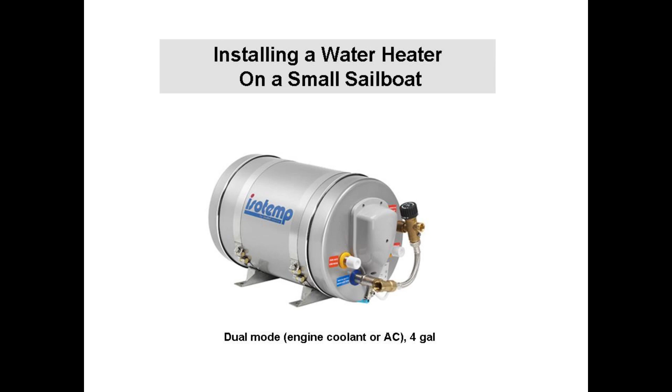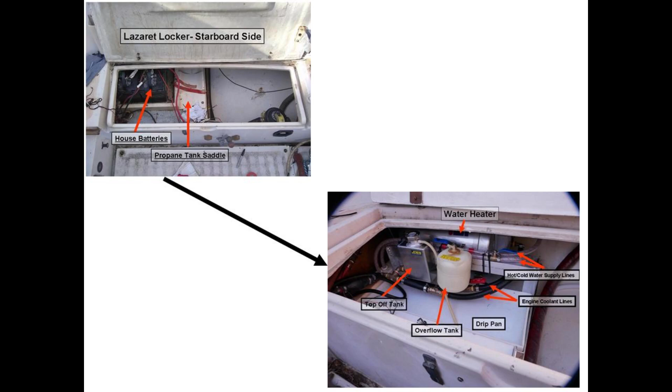I'll be turning this space in the lazarette locker you see on the upper left into this one on the lower right. Since the water heater is higher than the engine, I'll have to include a top-off tank, and I'll have to relocate the engine coolant overflow tank with it. So in this video, I'll go through planning where to put a water heater, building a self-draining platform for it to catch water heater leaks or plumbing leaks, and then hooking up AC power, connecting plumbing, and finally connecting to the engine coolant system.

So here's our boat, a 1979 Pacific Seacraft Orion 27 sailboat. It's 27 feet length on deck and about 9'3" on the beam. And at one time it looks like our boat had a water heater and it was crammed into the busy space behind the engine. We'll be going up here to the lazarette locker for this install, but I'm getting a little ahead of myself. So now a water heater is going back on board, but where to put it?

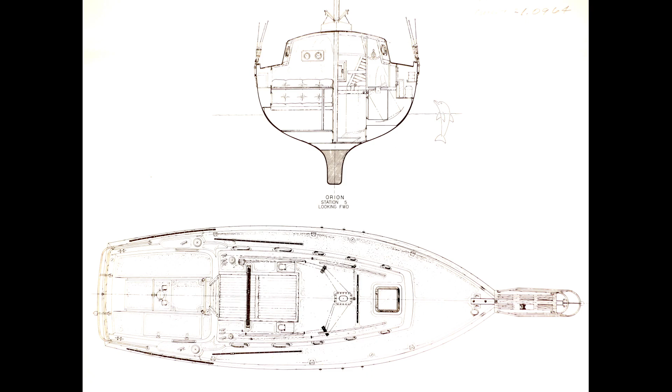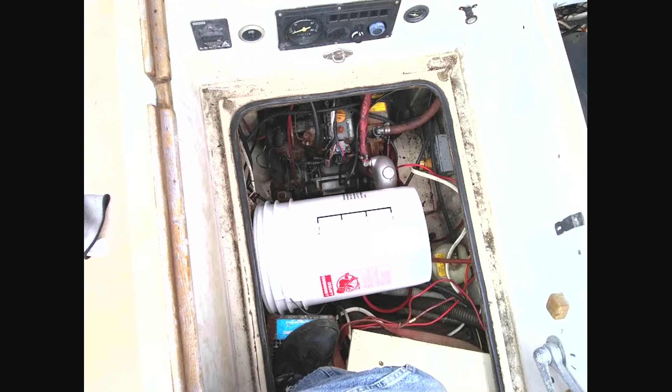Since the heater needs to be close to the engine to keep the coolant line as short as possible, and this is a small boat, there aren't many options, even for a small water heater. And the 4-gallon tank I chose is close to the smallest water heater I could find, whether cylindrical or rectangular. And besides, a smaller tank probably wouldn't be sufficient for a shower of 1 or maybe 2 people. The 4-gallon Isotemp Slimline heater is about 20 inches long and 12 inches in diameter, very close to the size of the white bucket you see here behind the engine.

This location behind the engine would keep the lines short, and it would also be below the fill cap of the engine's coolant system, so a top-off tank wouldn't be needed. And finally, another advantage, it would keep the added weight centered and low. So this is about where there seems to have been a water heater back in the day, but I think this would really limit engine access.

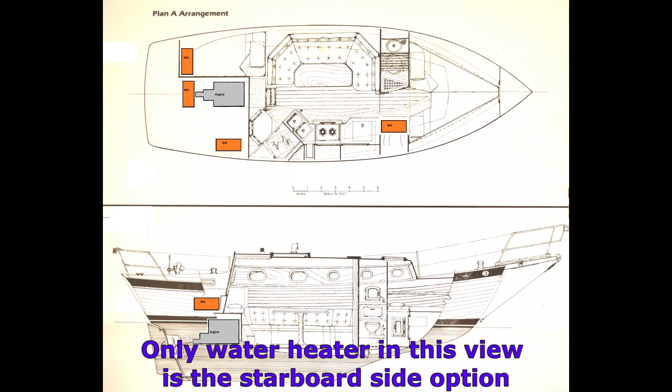So here on the ship schematic I have 4 brown boxes which are potential locations to house a water heater. The location in the midship area of the starboard closet, which some people chose for a water heater location, is far from the engine, and that might be fine for a 110 AC element to heat the water, but not for engine coolant. It's too long of a line. Anyway, the other location I see is possible in the port side quarter berth, but that's difficult to access to check on leaks, and it would also make it really messy to try to fill a top-off tank that would be required alongside of it.

So I decided to go with the space on top of the built-in fuel tank in the lazarette locker on the starboard side of the boat. The downside of this location is that I'll be adding about 50 pounds of weight on the starboard side. I'm not sure if that'll affect the balance of the boat much, but items I store in the port side of the boat in the quarter berth will probably offset this a bit.

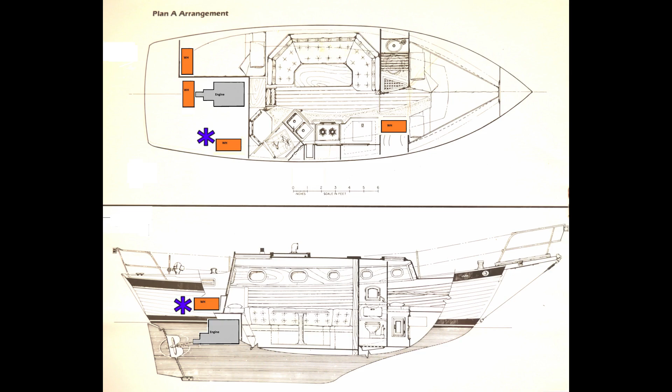First, I had to clear out a tray holding a couple of house batteries and a 6-pound propane tank used for the oven and range. That's a really bad combination to have in an enclosed space. And the tray that housed them, without an air gap underneath the tray on top of the aluminum tank lid, allowed water and salts to corrode the tank lid.

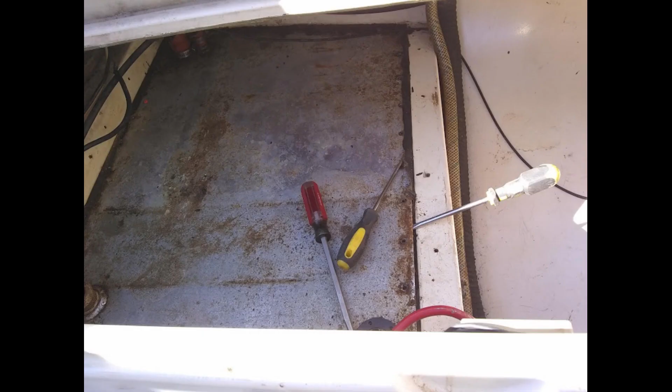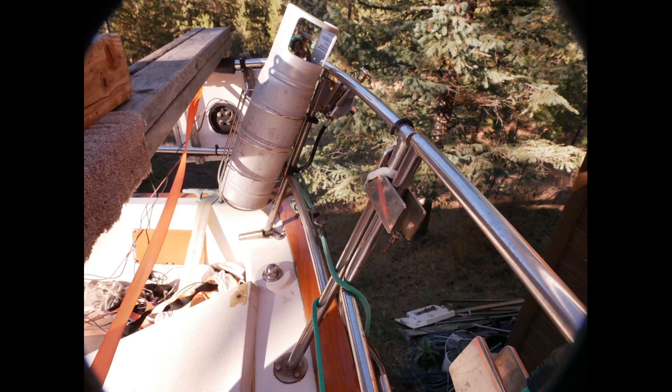So after clearing this space, I replaced the fuel tank lid with a new one, cleaned the sediment and sludge off the tank walls, and I added a circular access panel to enable me to clean the tank if needed, right there in the middle of the lid. The propane tank is now on the stern rail.

Next, you see here a dry fit of my plan. The water heater is partially concealed on the far upper right. It's pretty close to the engine, so I'll only need about 4 feet of coolant line, but the problem with this location is that it's above the engine, and that means I'll need to attach a small coolant top-off tank near the heater, and I'll need to replace the current cap on the heat exchanger on the Yanmar diesel 2GM20F with a 30 psi cap.

The top-off tank will get a 16 psi cap. And finally, I'll need to relocate the overflow tank next to the top-off tank. There is just enough clearance to get coolant lines up from the engine between bulkheads under the instrument panel and over to the water heater.

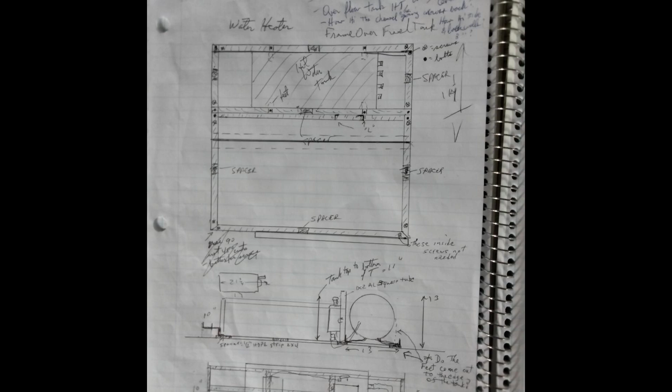So the next thing to do was design a mount to secure the water heater to the boat, along with co-locating a top-off tank and expansion tank with it. And since I was locating above the fuel tank lid, I decided to build an aluminum mount with a self-draining plastic tray to catch drips. I welded aluminum L-bar for the frame.

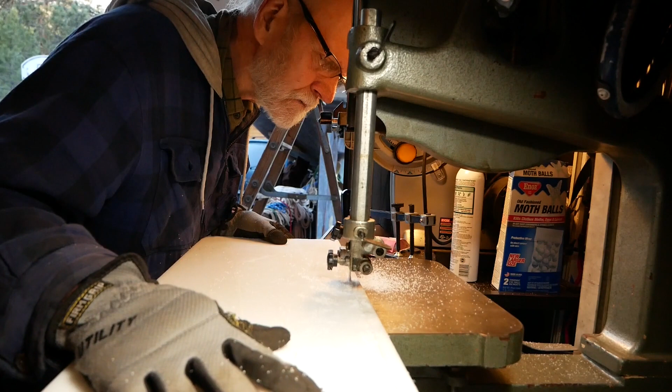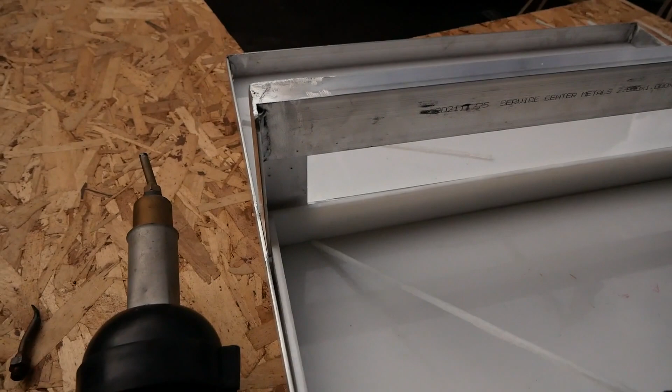After cutting out all the pieces for the plastic trays going under the heater and under the top-off and overflow tanks, it was time to weld those. This is a welding rod, if you will, that comes out of the scrap that I have. I'll be welding along these seams right here to make a waterproof tray. And I'll be swapping out the broad heat tip here with this tip made for welding into corners. So I'm going to start off with a setting here on the end of about 5.

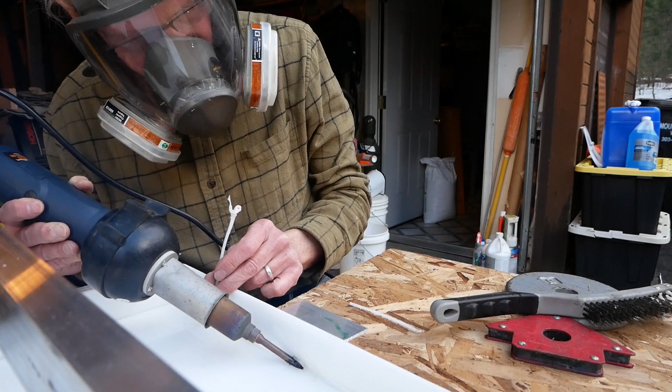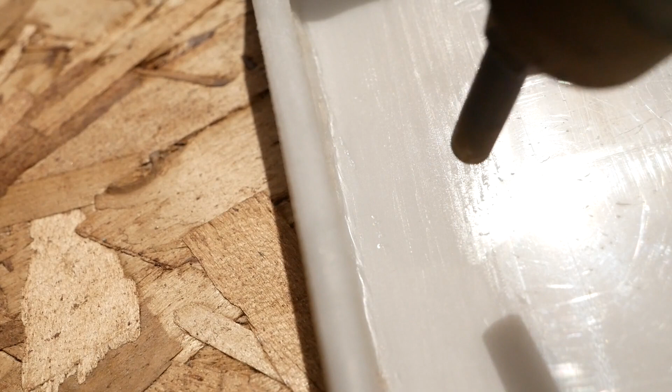I sanded and used a rasp to flatten uneven welds, then used a broad fitting tip on the welder to heat smooth the surface. Next, I installed an outdoor AC outlet behind the water heater and ran a 3-conductor marine grade 16 gauge wire from it to a new breaker on the AC panel. But after digging into that, it looks like I'll have another project ahead of me, and that's installing a new DC and AC panel and connectors. Back to the water heater.

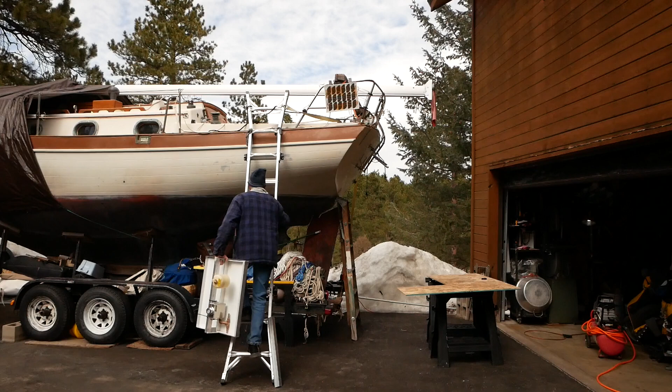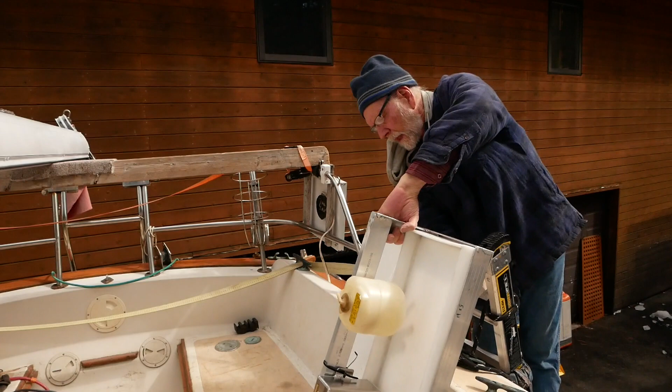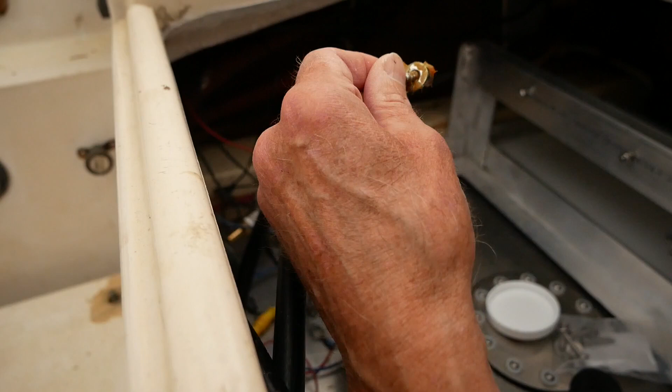Because this is a tight fit, I made many trips between my shop and the boat to check on my work with tray in hand. Water tank, hot water tank. That's a tight fit. When we get in here, I pre-drilled into the bulkhead surrounding the fuel tank and used 8 screws to secure the tray with the 1/4 inch thick plastic spacers underneath the tray and above the tank. And since the screws are stainless and the tray is aluminum, I coated the screws with Lanocote.

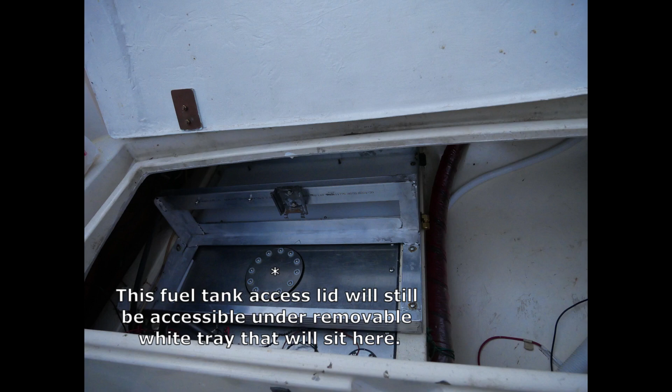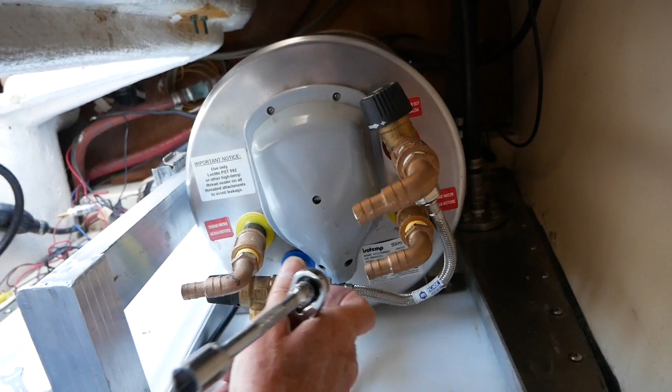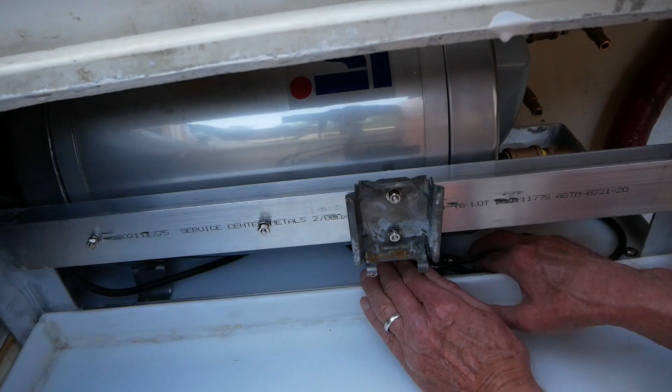Finally, it's time to mount the water heater and the other hardware. Anyway, finally got this thing in. Looks good and solid. All right, now to get out of here. Well, got cut on something.

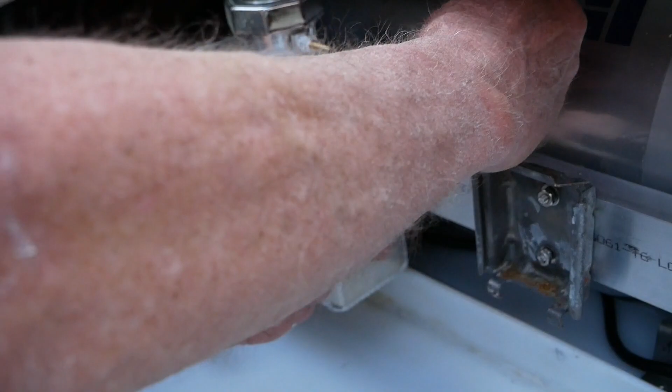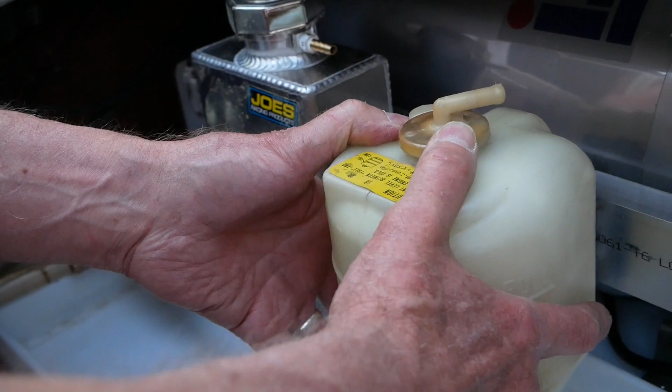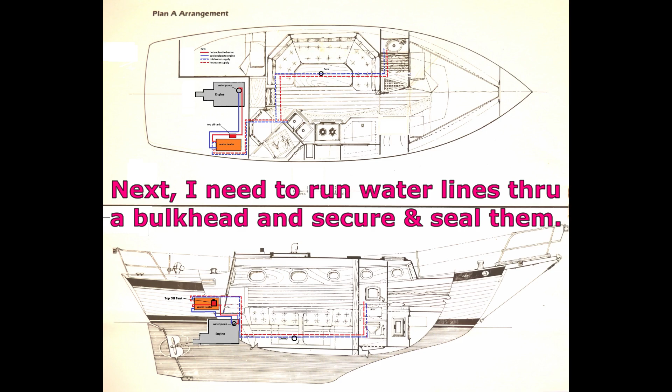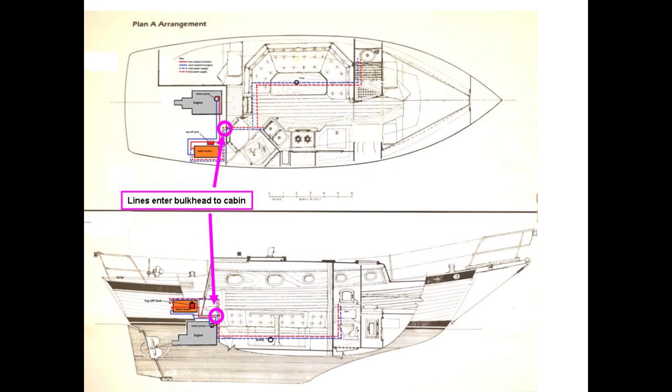That's the fill, this is the overflow tank. Once I get my sender connected here with these wires, I'll install this little overhang which both protects that sender and gives me a little extra storage space here. I then mapped out where to run. And starting with the water supply lines, they need to go through the bulkhead behind the engine. I wanted them to be held in place for stress relief on the water heater connections and keep water and other fluids from dripping into the cabin.

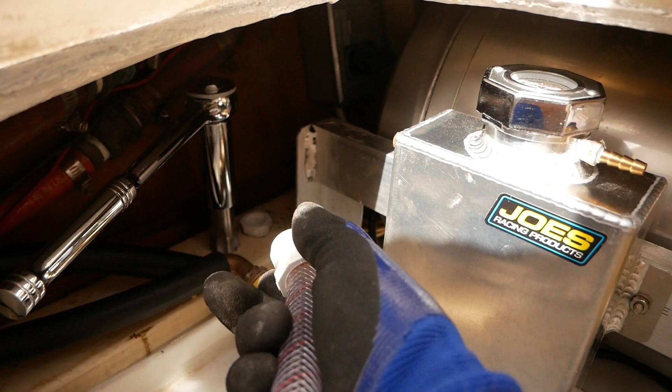I'm using a 3/4 inch pipe threader here, tap, and I'm going to go in after this and put in a little bit of epoxy to seal up the plywood. This is going through gel coat, then plywood, and then I'll thread in these little collars here. Well, I use them as collars, but they're adapters. Fairly tight fit here. Probably put just a dab of silicone on here to just seal it.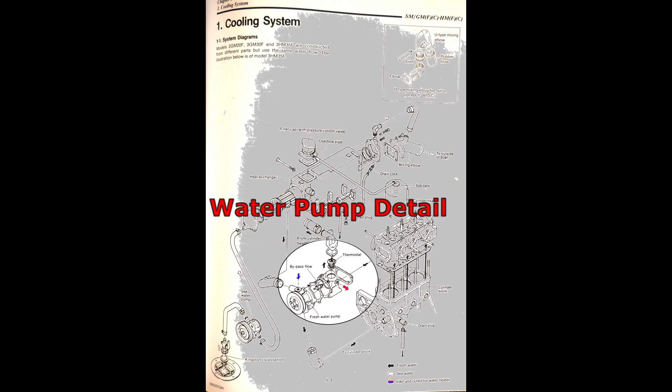Consulting the service manual for my Yanmar 2GM20F engine, I've identified where to attach the coolant hoses from the water pump to the water heater. I then drain the coolant from the engine since it needs changing anyway.

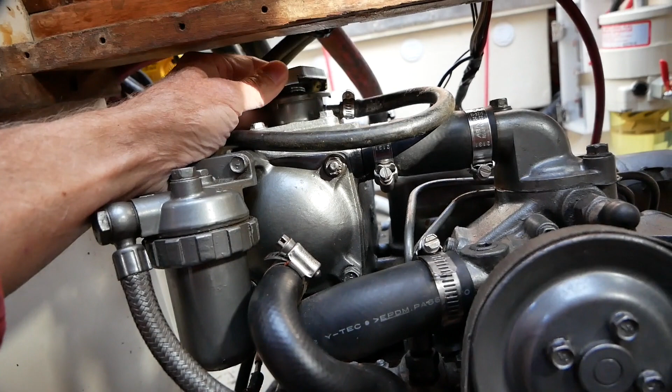So to let the fluid out, first thing I've got to do is release the cap here, top of the engine. And then over here to the side are two little thumb screw valves that I need to release. There's one up top, and then there's one you can't quite see that's right next to the lift pump. So I'll release those valves, and we should see some liquid falling out here into the drip pan under the engine.

All right, next step here is to install hose fittings on the input and output from the water pump here. And these are 3/8 NPT. Interesting, it's on a Japanese built engine, but anyway, so it is. And looks like to get this fitting in, I'm going to have to remove this piece of hose here.

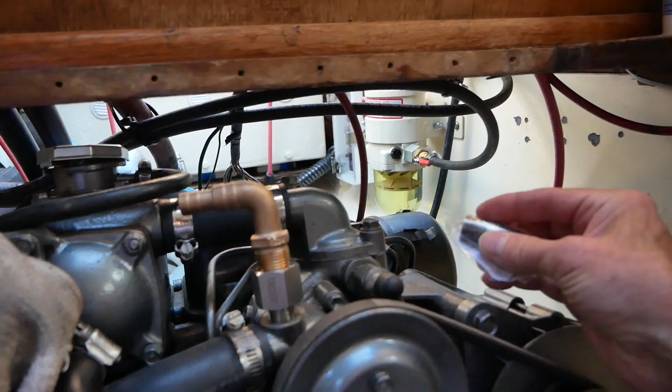And on this guy, I had to go to Ace and buy some parts so I can extend the fittings out enough so that I can turn my fittings into place here. Anyway, that's what's up next. Just enough clearance here to get past the alternator.

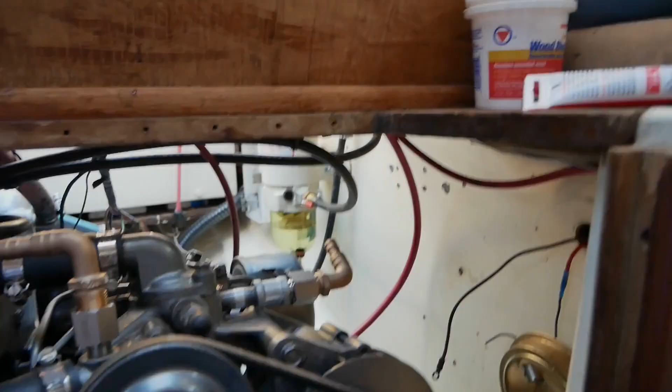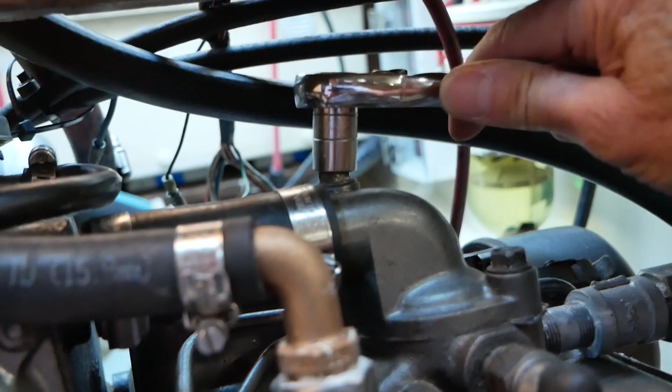All right, gotta test this out now. All these new plumbing parts going out, coming in. Hopefully there are no leaks.

All right, that completes this install of an IsoTemp 4-gallon slimline water heater. And just to recap what we have here, this is the hot water coming out, and cold water coming in from the plumbing system. And then down here, the coolant lines from the engine on either side.

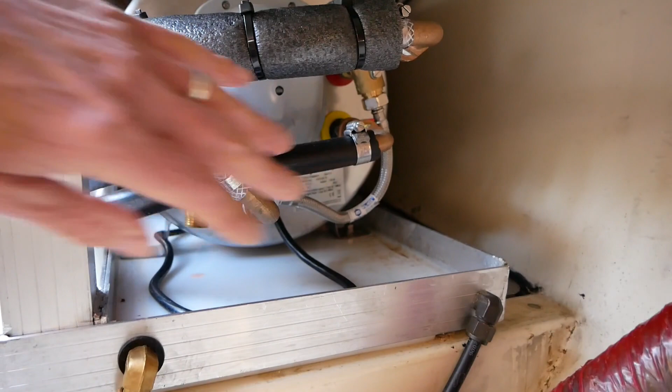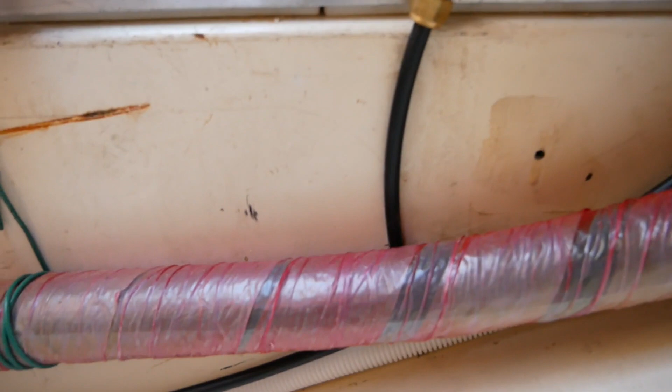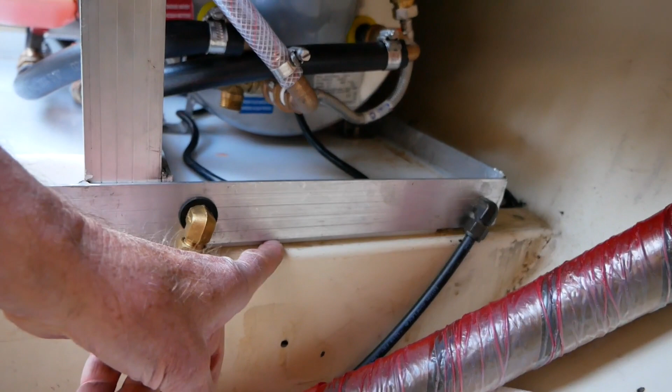And then, in case there's a leak from the water heater, these black lines are 3/8 tubing that run down to the bilge. And I put two in here, one on either side of this tray, depending upon how this boat is tilting for a tack, for instance. There is enough space under here so I can access bolts that hold the feet down. And that's for 7/16 bolts, 4 of them to hold down the feet of that water heater.

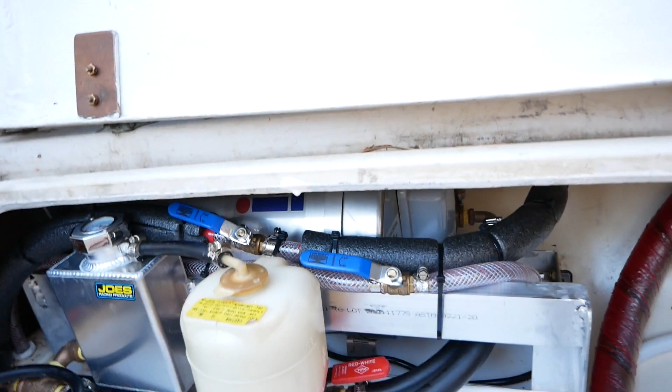So this water heater can be isolated from the coolant system of the engine with these ball valves on either side here. And similarly for the plumbing system, these 2 ball valves here. That way, if the tank develops a problem and I have to remove it, my plumbing system will still work, and my engine, I can still run it.

So since this engine is below us by about 1.5 feet, I need a top-off tank. So this is my quart-size overfill tank here, or top-off tank. Has a 15 psi cap on it. On the engine, there's a 35. And then this also is outfitted with a little temperature dial so I can monitor coolant temperature.

The tank is actually bypassed on this coolant line because it's teed off. So I can fill this tank. It doesn't get a continuous flow through it. And then finally, if there is an overpressure and coolant needs to be relieved, it'll go into this overfill tank, which is pretty typical on engines.

And finally, the lines from the water heater go down through a bulkhead here to join the plumbing system. So I have a tray back here, as I mentioned, a drip tray for the water heater, and then one out here in case there are spills from coolant when I'm filling.

Alright, I hope you enjoyed this video and found some useful tips for your project in locating a water heater and plumbing it on your boat.